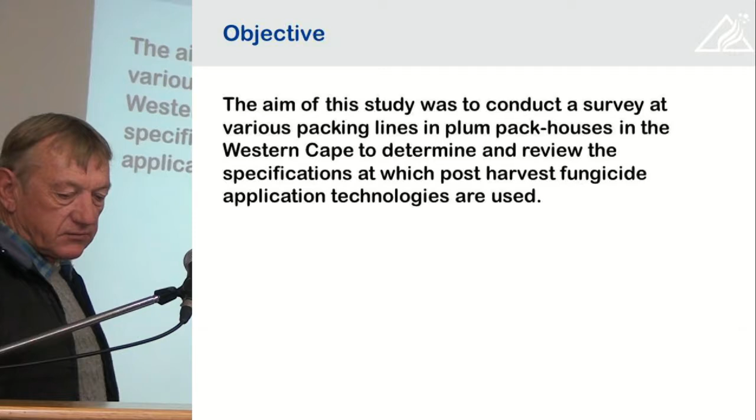Okay, so the objective of this study was to conduct a survey at various packlines in the plum industry to determine and review the specifications at which post-harvest fungicide applications are used. We did it all over the Western Cape, as you can see there, in packhouses in all those areas.

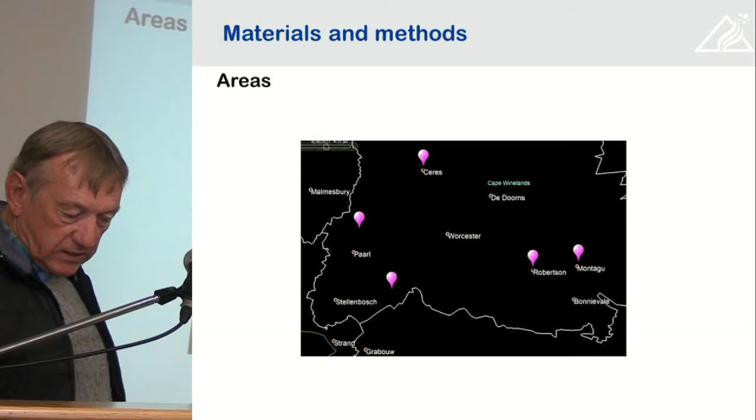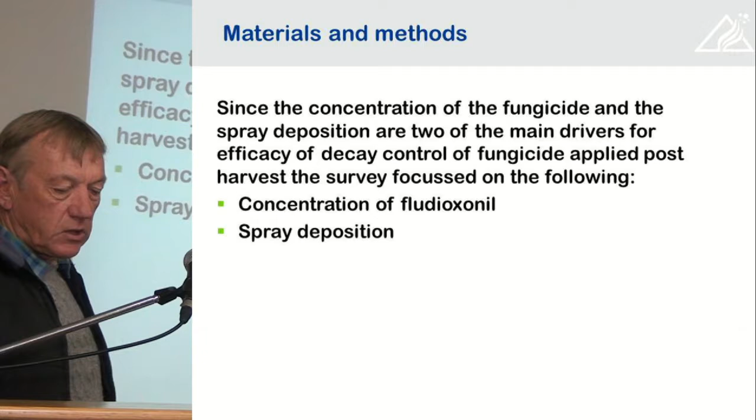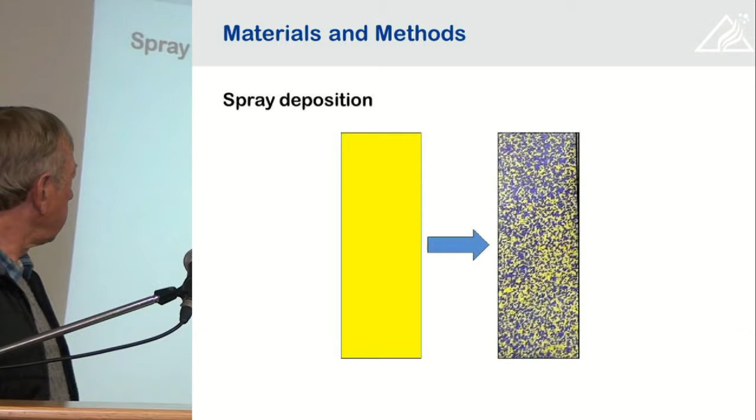Since the concentration of the fungicide and the spray deposition are two of the main drivers for the efficacy of decay control, we focused on the concentration of the fludioxonil and also the spray deposition. When it comes to the spray deposition, we used water-sensitive paper, and as you probably know, this is what the paper looks like, and if it's sprayed with water, it will change in color.

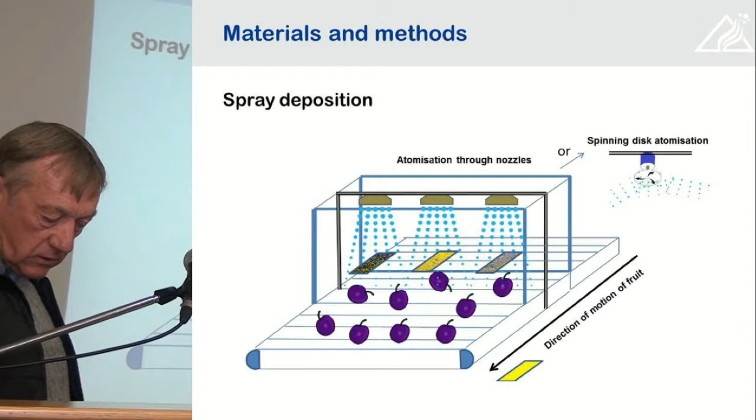For the spray deposition, on the pack lines, we put this water-sensitive paper through on the sides and in the middle, and then we compared to determine how the fungicide was actually applied across the pack line.

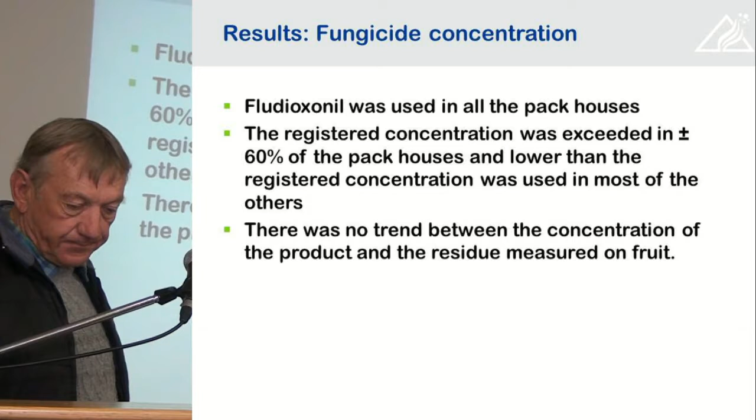The results. In all the pack houses that we visited, fludioxonil was used. We did find that the registered concentration was exceeded in about 60% of the pack houses, and in the others it was lower. So there were very few pack houses that actually applied the fungicide according to the label. But there was no trend between the concentration of the product and the residues that were measured on the fruit. That led us to think that it probably had something to do with the levels of application.

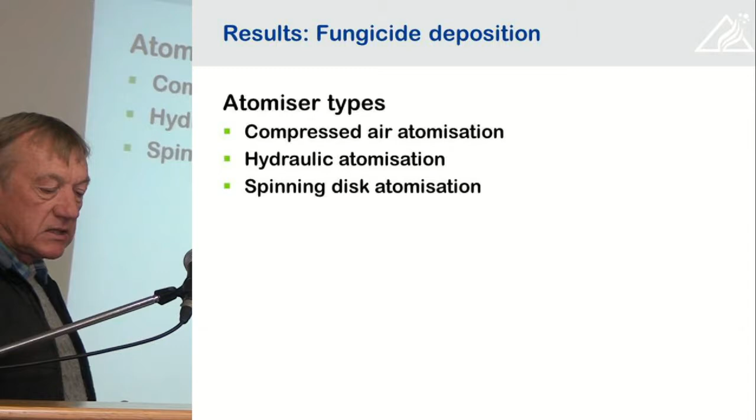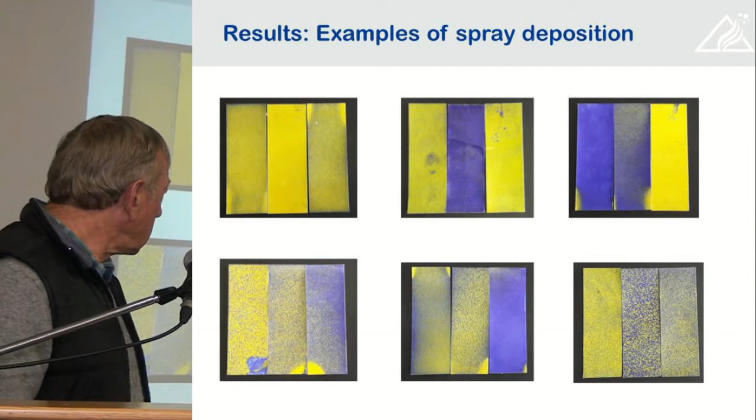In some cases, it was something like that. I would say you would get a good average fungicide residue on all the fruit that went through that pack line.

So our recommendation is very simple. You can stick to the recommended dosage. All three atomizer types can be used, but they must be calibrated to deliver, as it is stated on the label, 1.2 liters per ton. And then, I think that is the main point, is to ensure even coverage of the fruit by checking that the nozzles all deliver the same amount and that the nozzles are not blocked. I think that was the main problem that we found there.